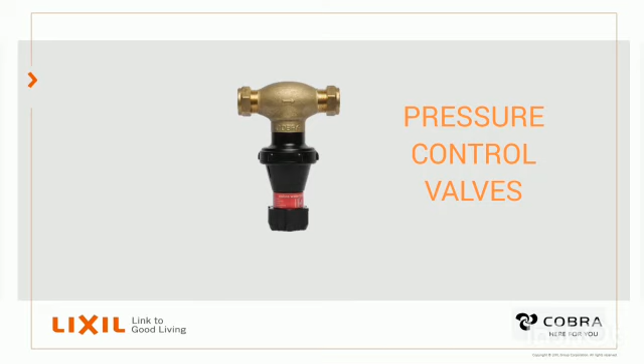All Cobra pressure control valves have an arrow embossed on the side. This is to indicate the direction in which the valve has to be fitted. All pressure control valves are color-coded, making it easy for the plumber to identify the different pressure categories.

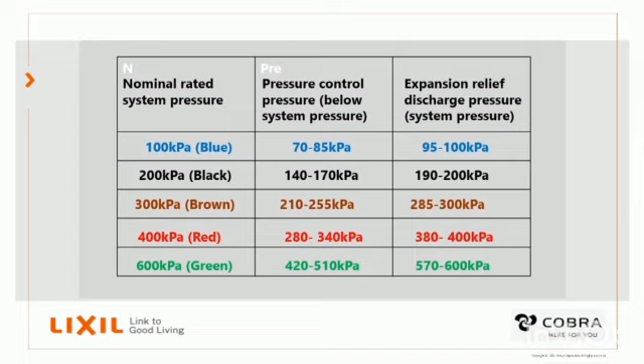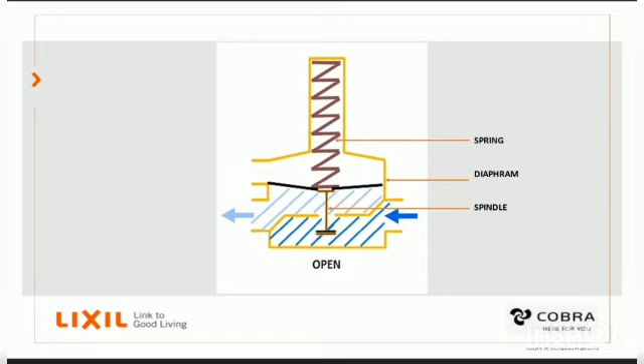How does the pressure control valve work? Here we can see the spring is pushing down on the diaphragm and spindle, pushing the spindle washer away from the main seat and allows a clear passage so that the water from the inlet side can flow under the diaphragm through the main seat and out of the outlet. This would normally happen when a tap is open.

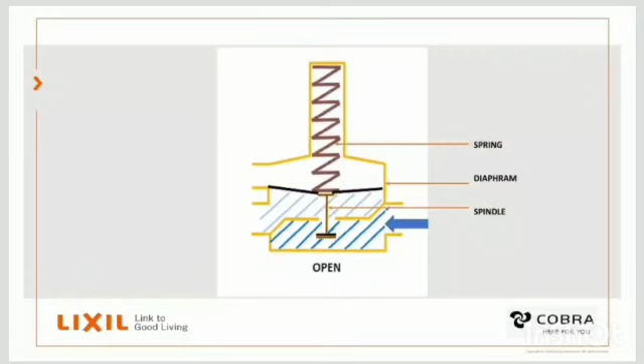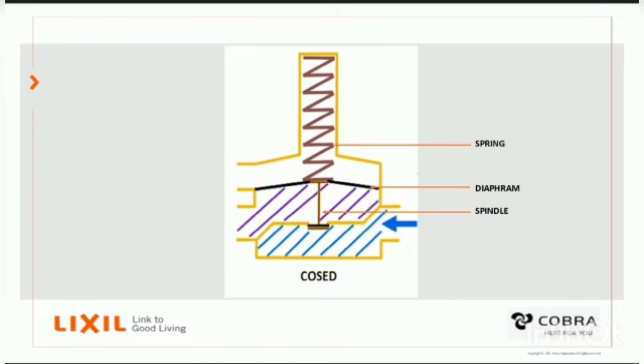So when a tap is closed or the water on the downstream side is stopped, the pressure would very quickly start to mount under the diaphragm, which overcomes the weight of the spring. So whatever the weight of the spring was, let's say 340 kPa, when the pressure on the downstream side gets to 340 kPa, it overcomes the spring, pushes it up and pulls the spindle with it, and the spindle then closes the main seat.

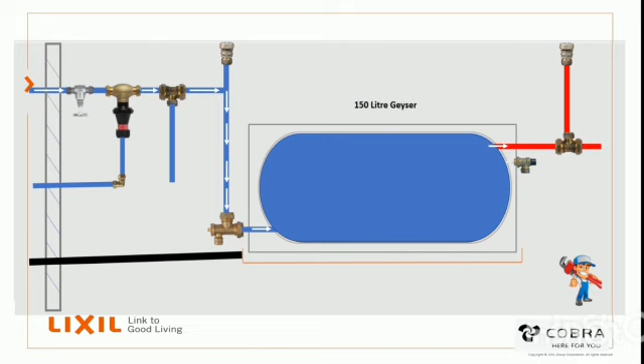Here we can see a typical operation of a geyser. Water coming in from the pressure control valve side fills up the tank and is then released by the hot water outlet. So as we know, when water is heated, it expands, and expanded water is released through the pressure control valve into the atmosphere, and I'll explain to you in a bit what happens inside the valve.

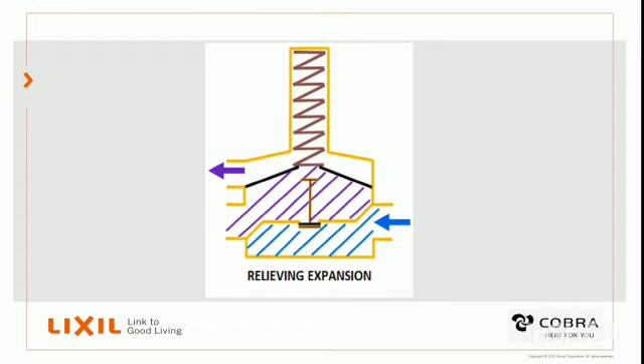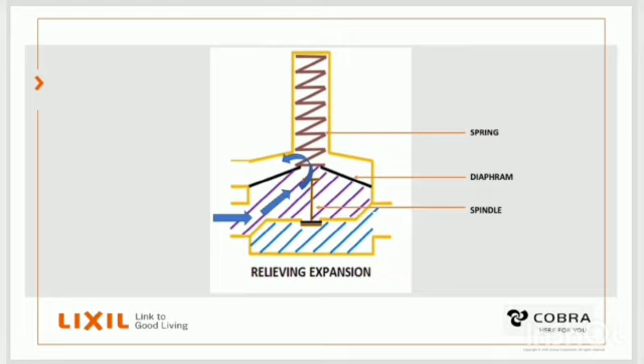So when water expands, the expanded water needs to get out, and this water can't get out through the main seat because that's already closed. So the only other thing the valve can do is to push the diaphragm further against the spring, and the diaphragm lifts off the release seat, and this happens between 380 kPa and 400 kPa. It then clears the passage for the water to get past the release seat and drip out the overflow.